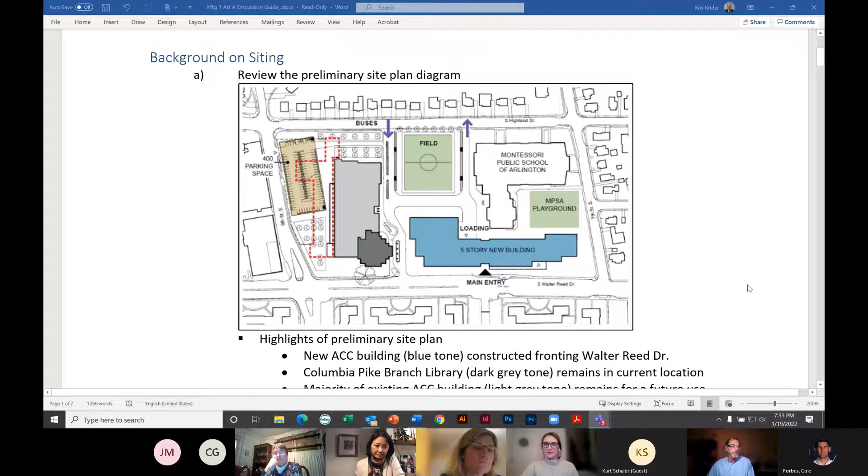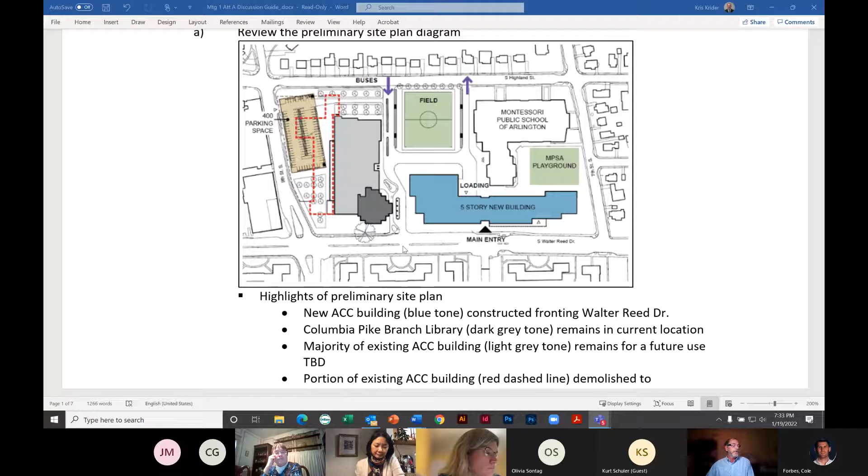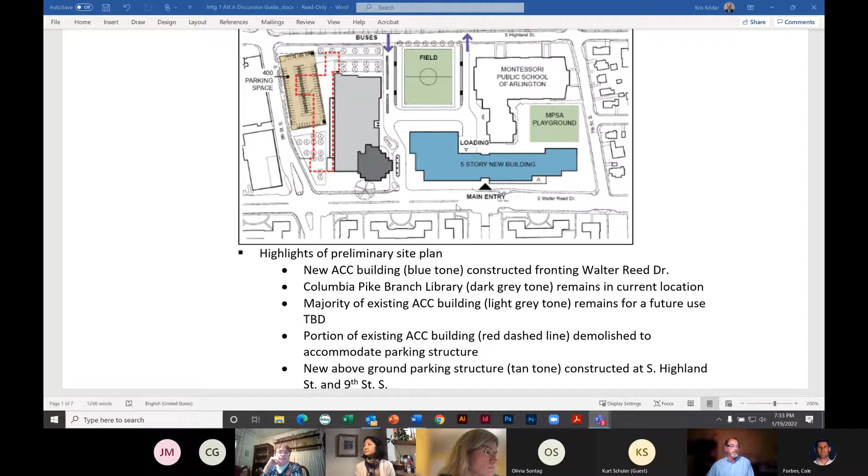All right, so this is the map we've been working with, and as you oriented yourself during the presentation, this is the main new building, the blue building, the existing Montessori school, the playground field, and the existing Career Center building, which will remain. The dark gray area is the Arlington branch of the county library, the Columbia Pike branch. So portions of that building, shown with the red dashed line, are going to be demolished, and then a new parking structure, 400 space parking structure, will be located in that near vicinity.

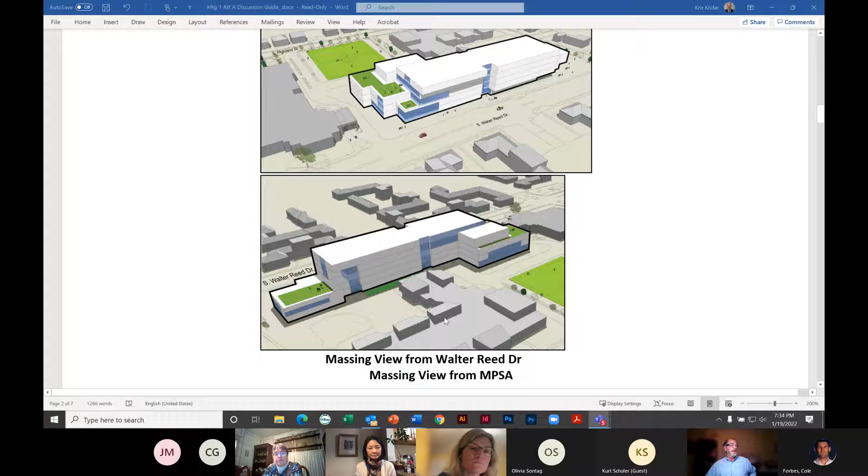And then here's some 3D diagrams. I'm going to come back to this because our first question is about height. So this is a 3D diagram. You can see Walter Reed here, 9th up there, down here in Highland. And then the backside view, so to speak, or the other view which would be from the west.

And so let's go to, and then we have the information that Jeff shared about transportation. So when we get to these questions, we can come back to some of this, the rationale, some of the goals and so forth as we get there. And then also, as people bring up issues or concerns, and we want to reference this information, we certainly will.

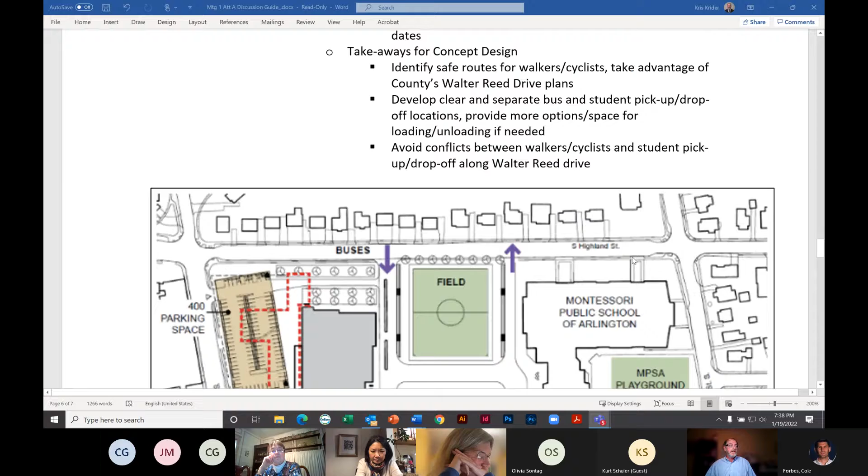Okay, great, let's start with Cole. So the question for us, Cole, is there are portions of the building in blue that could be adjusted higher, taller, etc., in exchange for more open space on the site. Let's go back to the 3D diagram here. This is a question for everybody.

So I just want to mention this is my first meeting I've attended. I'm one of the teachers at the Career Center, so I'm still kind of playing catch up. I've seen the emails the last few days, but I'm still catching up. I don't know how much I can add, but please ask the question. I'm just saying this is my first time coming to one of these meetings this year.

Well, thank you, Cole. Have you lived in the area or have any experience with other Arlington processes? No, I have not. Okay, well, welcome to Arlington. Yeah, this is how we get it done.

People sometimes just react to what they're seeing. Nobody necessarily is here as an expert, we're all expert in something but maybe not the expert in this topic. So in your sense, looking at what you're seeing and the neighborhood around it, you see some single family houses, some larger apartment type buildings across the street. You're familiar with the area since you work there. The existing building, I believe, is 3 or 4 stories high, so not considerably higher than what's out there now. Oh, it's 2 stories, the Fenwick building. Okay, in this building, in this vicinity.

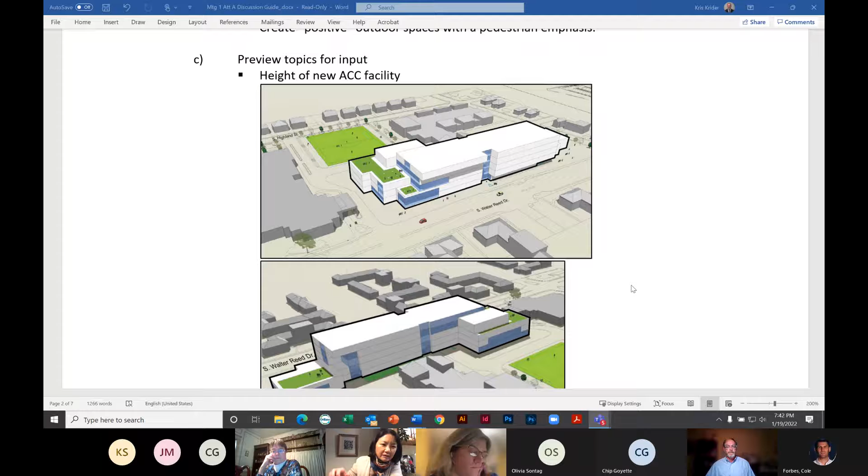Margaret, you want to go ahead and offer your thoughts? Yeah, I wondered if it might help to provide some context as to the layout of the neighborhood. So along Highland, it's residential.

On 9th Street, it's single family residential on the west side. Yes, residential along 9th. And across Walter Reed, we have apartment buildings and more commercial space. Giant is across the street.

So the idea of building up along Walter Reed, away from the residential area, seems like a good idea. If the green space goes down towards the neighborhoods and the height increases along Walter Reed, that would maximize the use of space and create green space toward the residential area. So I would favor that. I think that makes sense.

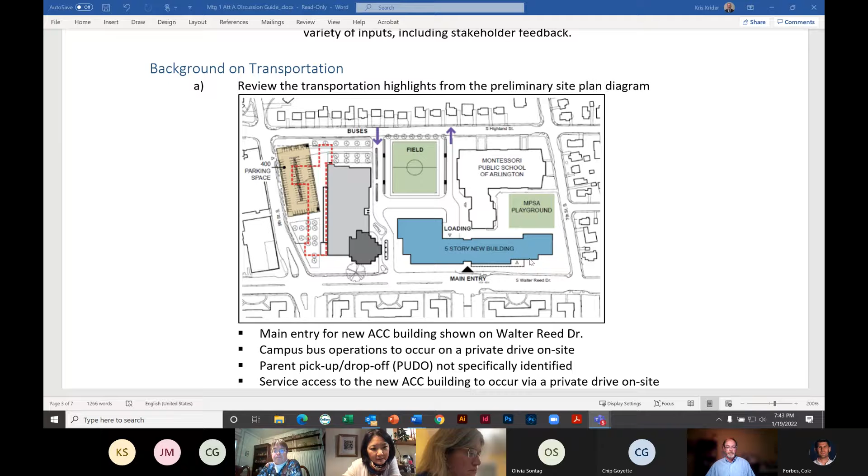I believe the way the zoning works in terms of the coding, you are able to build up to 4 or 5 stories along Walter Reed because it doesn't face the residential area. So that's my understanding. Would you support additional height above 5 stories anywhere here to create more open space?

It would depend. I think we need more context as to the larger plan.

First, I need to introduce myself. I'm the principal of the Career Center, this is my 8th year there. I've been through this process since the beginning. We've gone through this many times — the Career Center Working Group, the BLPC, the PFRC. It's been quite a process.

There have been many different proposals for where we would build the height. In the concept design proposed from the previous BLPC PFRC process, the idea was to build height along 9th and Walter Reed, at least six stories.

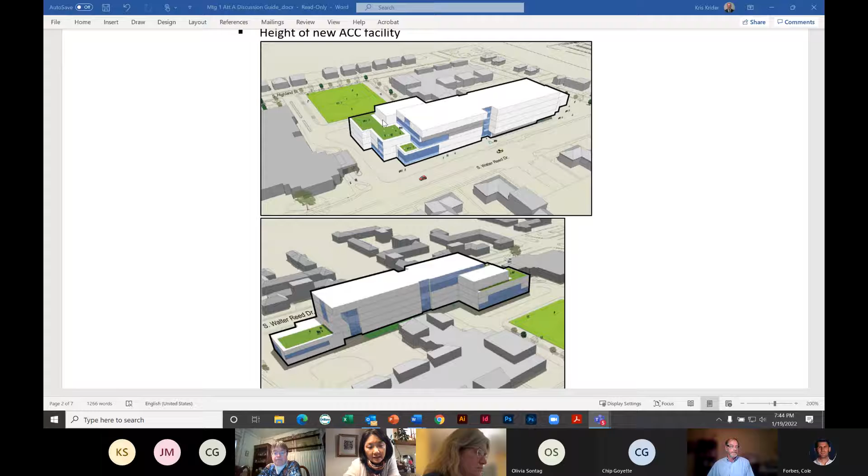Now that we're going to keep the original Career Center building and not demolish it, and build a new building along Walter Reed, it makes sense to maximize that area to increase the height. I'm not sure what the long-run plan is, because previously the idea was to build height along 9th Street, since that faced the commercial area. So what I'm seeing now is that idea has changed.

Now they're going to build a parking garage along 9th Street, that's what I see. So if the only area we can build up is along Walter Reed, it would make sense to maximize the square footage we can obtain there.

Okay, thank you. Let's go next to Christy, and please introduce yourself, Christy.

Hi, I'll lower my hand. My name is Christy Salbert. I'm the president of the Arlington Heights Civic Association — this is the neighborhood we're talking about. I've been president for about the last 4 or 5 years, and I've lived in Arlington Heights for over 20 years. I was a member of the Career Center Working Group, the PFRC, the BLPC, and now this, and I've represented the neighborhood for a long time.

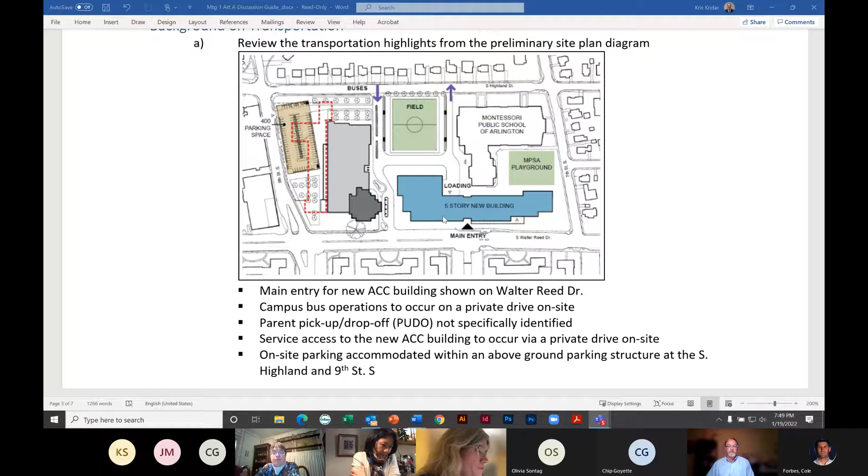I don't know if you're going to ask this question later, but I'll go ahead and say it. I would probably site this differently, moving the blue portion vertically across this design so you're not taking up the green space at the corner of Walter Reed and 7th. But I guess it's okay if that's as good as it's going to get.

Okay, thank you. Chip, please introduce yourself and share your thoughts on height. Just so everyone understands, this is the site plan working with a budget that has been outlined, the site plan that APS wishes to advance. So what we're trying to do is fine tune this.

I certainly agree with a lot of the comments our first two speakers made about the utilization of this space, and what is really the future of this long term. Those are all comments we're capturing and I think are germane to the overall discussion. So just so everybody knows, this is the plan we're working from, and these are the heights being proposed.

So the specific question, Chip, is: would you find it acceptable to add additional height to the 5-story building in exchange for additional open space? Okay, and please introduce yourself too.

Sure, so Chip Goyette, I'm the Douglas Park representative on the BLPC, and I was on the previous BLPC just as Christy was. I've been a long-term resident of Arlington for more than 20 years, living between Penrose and Douglas Park area. So in terms of the height of that bit...

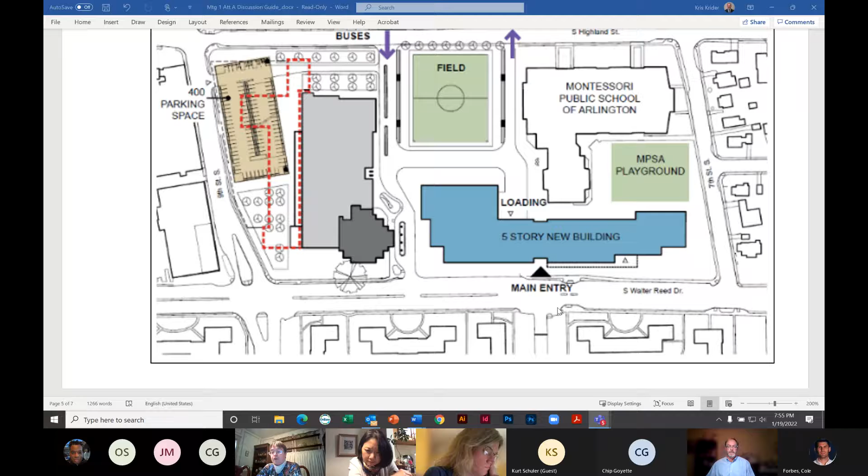The other thing to take into account, which isn't clear from any of the discussions so far, is using orientation and massing of the building to maximize passive energy efficiency - making sure you're taking advantage of sunlight for heat during winter and cooling during the hotter summer, as well as taking as much advantage as possible of natural light within the schools. Numerous studies show that this actually helps improve educational attainment. So those are the things I'd be looking for, and I don't quite see them in these very stark, minimal diagrams.

Thank you, John. Those are excellent comments, and continue to make them through the process, because what we're looking at right now are concept diagrams - literally block diagrams. The next phase we'll see is schematic design, and that's where they start showing the landscape. Then ultimately it moves into construction documents and so forth. So all of your points are noted.

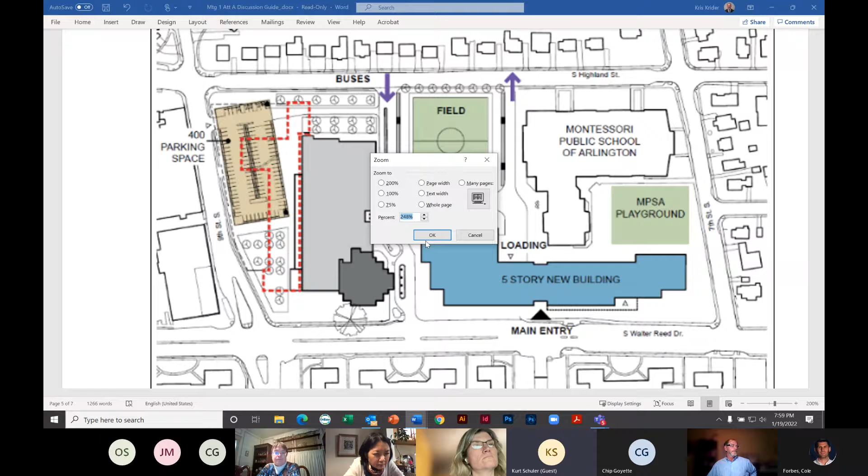Thank you. I see there's one entrance exit. That's fine if people are not going to be very bunched up at the times they enter and exit. If they are going to be really bunched up, then it might be desirable to have another entrance, which could be closed off during non-peak times.

Good point, good point. Who do we have next? Chip.

Any thoughts on the garage placement, or anything to consider in terms of the design or other uses?

So the parking garage, I think it's interesting that it's right there, because right now, and I know we're not talking about transportation, all the drop off and all the congestion right now is on Highland Street for this site. So obviously a 400 space parking garage is going to bring a lot more congestion to all those homes at that location. So if redefining the site, putting blocks in different places was available, I definitely want to start having that conversation. And as someone that works in transportation every day as part of my day job, the 400 parking spaces seems pretty high to me.

There's only 260 parking spots, for instance, at Wakefield, which has 2,200 kids, including a lot more drivers than are going to be at this site. So I truly question that many parking spots, mainly because more parking will attract more driving. And I realize teachers don't live here, but you can do van pools, commuter shuttles, a whole host of things that can help teachers, because we do it every day where I work. We run those things, and it gets employees to our hospitals, and they love them because they don't have to worry about traffic or stress. So I would also agree with Joan, if it is a garage, you should definitely have solar panels on top, and a green roof if possible, but probably solar canopies would be the best option there.

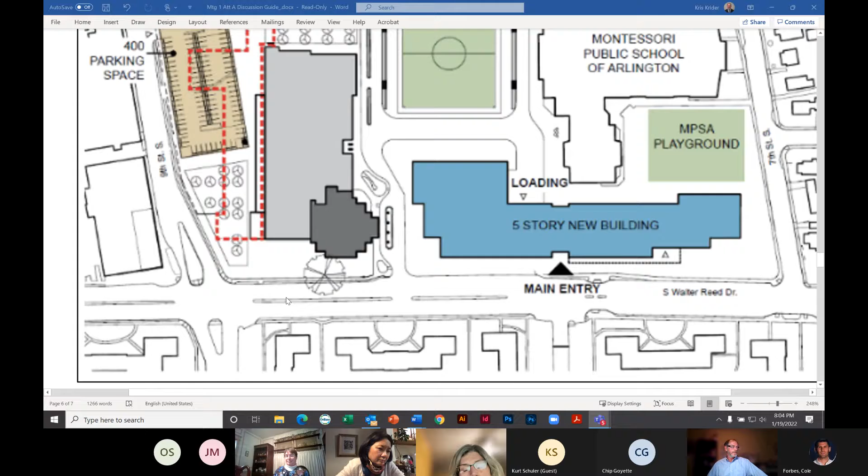And I feel that strongly for teachers who, if they're a lot younger and didn't buy their house 20 years ago like I did, it is unaffordable to live in Arlington and have a single family house with a yard, which is what a lot of people still want. And so we are in a teacher shortage. They're dealing with a lot of things right now. I cannot agree to having them, what I've heard from teachers over and over from Fleet TJ, is that they have to come in from wherever they're coming in, Fairfax County, Loudoun County, Herndon, etc. And then the next thing they have to do is circle the neighborhood for 10, 15, 20 minutes looking for a space.

Well, Christy, I hate to interrupt, but we're already well behind our time. I know, so please let me finish though. Well, just- so, as I take it, my takeaway is your point is please right-size the parking.

Okay, and I think everybody on the call knows about the issues that you're raising, so I think they're really valuable. But yeah, I don't think everybody knows, I think these are all BLPC, PFRC members who've been slugging through this process for years. So I just want to make sure that we are able to answer all the questions and that everybody has it. Okay, thank you.

Do you have any other quick hit points about the parking garage location? Location, no. Okay, thank you. Thank you, appreciate that. Let's go now to Margaret.

Yeah, I think due to the existing areas that are already planned, it makes sense. So yes, I think having the garage located there, and in terms of the number of spaces, just to let people know, it's not just Career Center staff that will be parking there. Montessori staff, library patrons, any visitors that come to campus, parents, any events that happen. So it really does encompass a lot of visitors and also other people that need to park on a regular basis. Right now, we have about a quarter of our staff having to park on the streets, and any visitors who come to the Career Center have to circle the neighborhood to try to find parking. So to have sufficient parking is very important. The location makes sense because there's no other place really to put it.

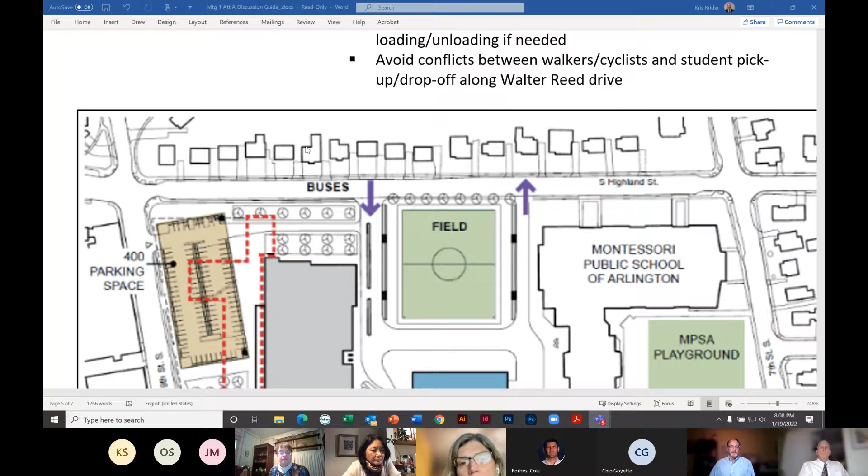Yeah, I just wanted to say one more thing about Highland Street for people who don't live in the neighborhood or aren't familiar with it. Highland Street has some single family houses on the north portion of the street, but on the south portion of the street, those are duplexes. And it's very, very congested or dense there. So as far as parking on the street, it's pretty much all taken up. I just wanted to say it's a very dense area around that place because of the duplexes, and a lot of families that live in the duplexes are multi-generational.

And so that is something to keep in the back of your mind.

Okay, thank you. I think we've really touched on question 3 because many of you have discussed the strengths and concerns around the plan that's been presented. There were questions about the utilization of Ninth Street as it had been done, and about the orientation of the building. I think we've captured most of those thoughts and strengths. Margaret was talking about that, and several people mentioned that if we were going to have height, the best place to put it is along Walter Reed.

I will give everybody a quick opportunity if they want to add any additional comments about the preliminary site plan. Here's your chance. So I think Joan had her hand up.

I'm sorry. Kris, I just wanted to say I just popped in for a little bit and I've been listening. Does anybody have any questions for me? Jeff Chambers. If not, I'm going to pop into another session. All right, okay, carry on. Sir. Hey, Christy.

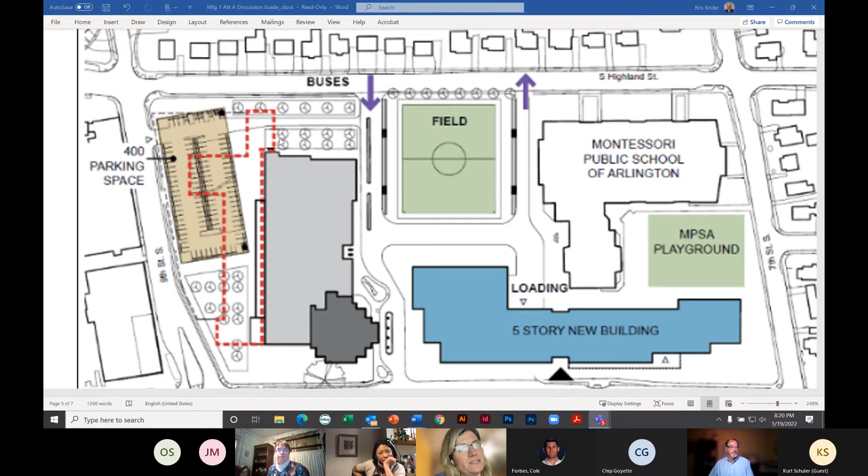So in summary, I would add teacher satisfaction and retention, and also consider changing the traffic flow, maybe closing off 9th Street, perhaps making Highland one way.

Okay, thank you for those comments. Let's go to Chip, I'm sure you have some thoughts too. Oh, I wonder if we didn't lose Chip. Oh, there you are, okay. Oh, you're on mute, sir. Sorry about that.

I would say again, transportation goals should be minimizing, as part of right-sizing the career center transportation infrastructure, because it's about reducing cars whenever possible. As someone who travels up and down Highland Street regularly during school hours, I think a 400 parking garage is just going to be impassable for bikers, walkers, anybody. So when you say safety of students, I hope you're meaning all students, not just the students at the Career Center or at HB Woodlawn. It's students that have to traverse that area to get to TJ, many to get to Fleet, and so forth. Please expand safety of students to all students that go through that area.

Thanks. And then the second thing I would say, I'm all for teacher retention and satisfaction, but I'm for doing it in a different way. Where I work, nurses and other technicians in healthcare love taking our shuttles. These are folks working 12-hour days, probably not making a lot more than teachers either. One of the things they love most are the shuttles, because they get to decompress going home on those. There are things that could be done here. I don't think Fleet did that. Fleet didn't offer shuttles or van pools for folks working from outside the county, but that's something that should be looked at.

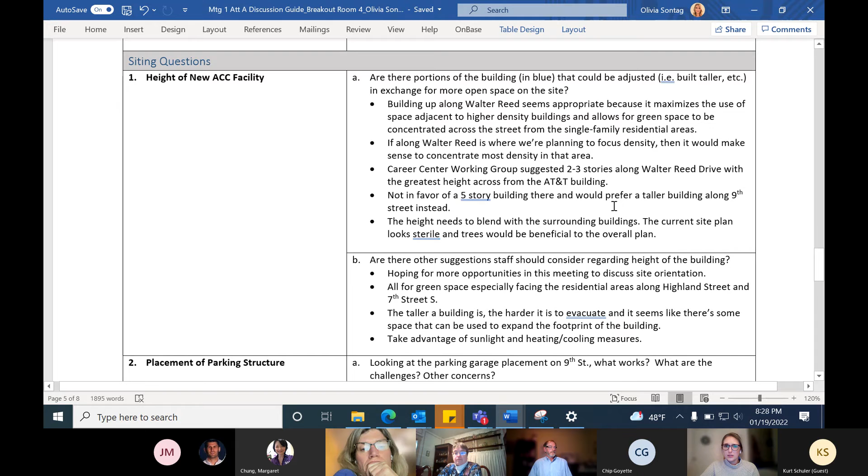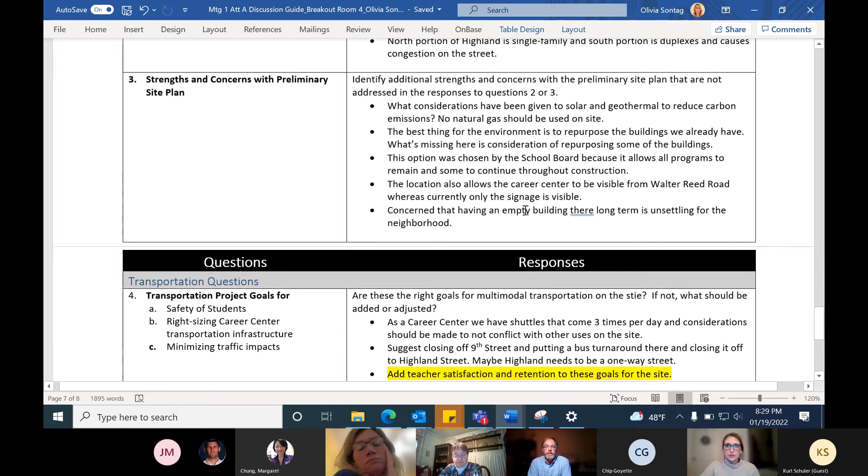So I think we discussed — there was some general consensus about building up along Walter Reed, that seemed to be consistent across that height discussion, with some of the height concentrated along 9th Street across from the AT&T building. Jumping down to the placement of the parking structure, we want to consider flexibility, such as solar panels or possible future green roof accommodations, and understanding the current situation of lots of teachers commuting, or needing to commute, by car.

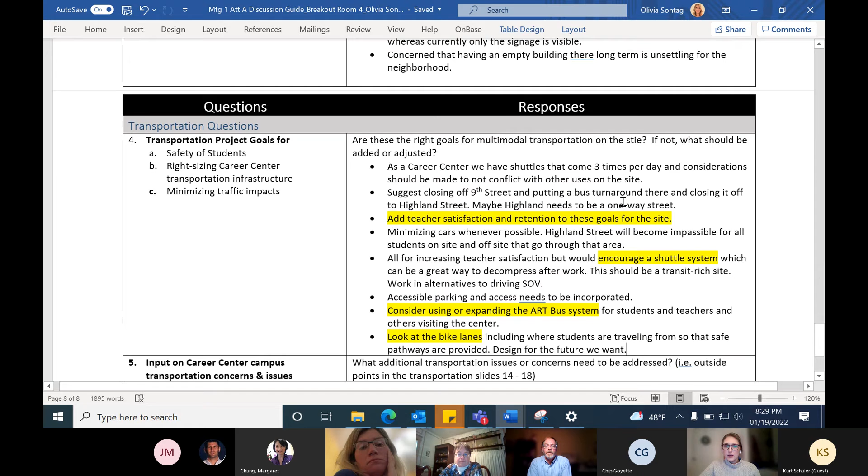I think some of the best discussion we had this evening was on transportation — encouraging a shuttle system, considering using or expanding the ART bus system, looking closely at the bike lanes, and adding teacher satisfaction and retention to some of these goals for the site. So, other than some of those things I highlighted...

I think we want to add on to the last one — Joan was talking about, and I thought it was a great point: design for the future we want, and flexible.

Anybody else have anything else? Yeah, I would just add and stress sustainability and building to zero carbon standards.

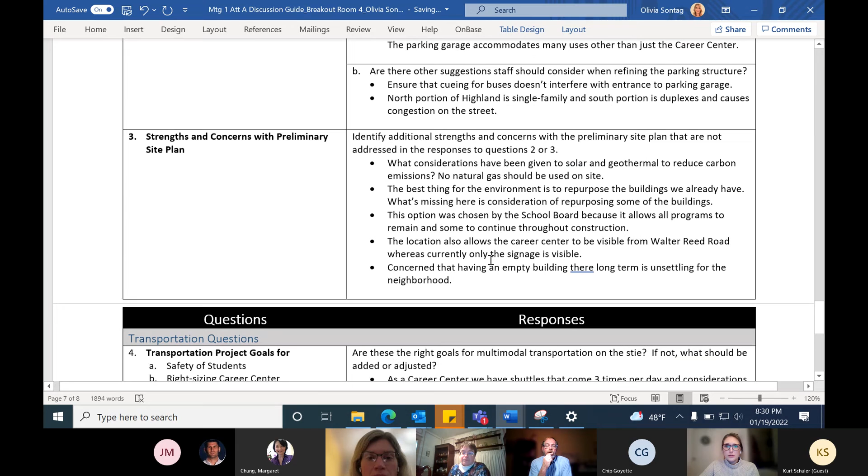Thank you — but I just want it said that we are not in consensus about that. I can understand building for the future, but I don't agree with a lot of these pie-in-the-sky ideas that Arlington County cannot afford and will never implement. There are people living there today. If Arlington County wants to start these shuttles out in Loudoun County, yay, I'm happy for that, but this site should not cure all of society's ills. There are people living there today who have to deal with what's happening there today. It's very frustrating for me, leading this neighborhood, listening to a lot of people who don't live here and don't deal with this every single day. So I just want it known that we are not in consensus on that.